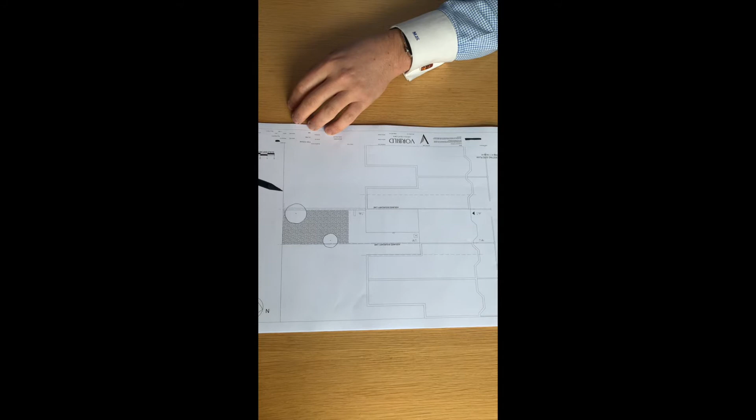Again, a very typical project from start to finish, where we were planning to do a rear extension, a side extension, and a rear dormer. So let me walk you through it.

As you can see at the beginning, it's again a fairly typical setup. You have a narrow entrance passage. The front reception room has a separate door, the rear reception room has a separate door. This one differs because somebody put in a window in between, which is definitely not original.

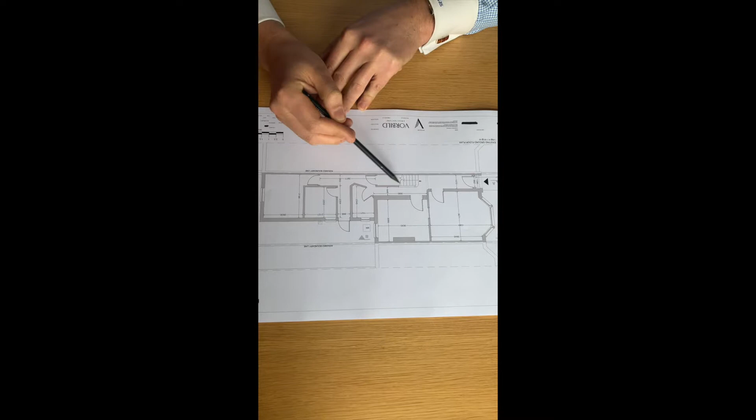And then we walk past - there was a downstairs bathroom already, and believe it or not, that was the kitchen. And then we had a room at the back, which probably would have been better as the kitchen, but still it's pretty small and awful.

Going upstairs, we have 3 bedrooms. Biggest size bedroom is obviously on the front. That bedroom isn't too bad either, and somebody has actually done some work before we came on board.

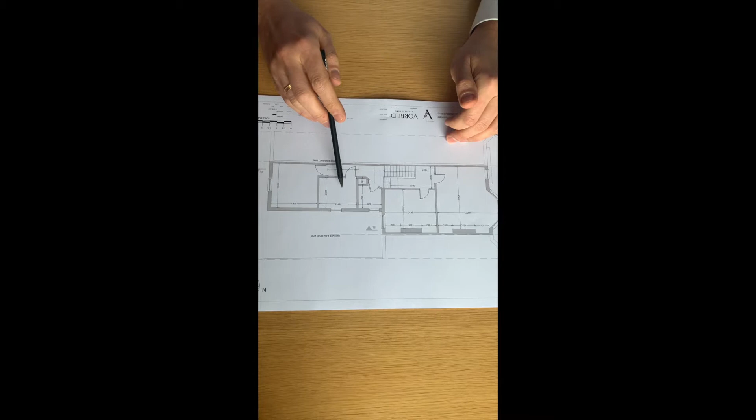There's a small WC and a larger ensuite family bathroom, and of course the rear bedroom, which is always the smallest, like in our case.

And there's nothing - so in our case, just going back to this quickly, somebody removed most of the ceiling above here. So when you're here, you can actually look up, and it makes you feel as if there's much more space. Obviously, now that we're doing the loft space,

the ceiling obviously has to match the ceiling height of the main house. But let me walk you through the proposed plans now.

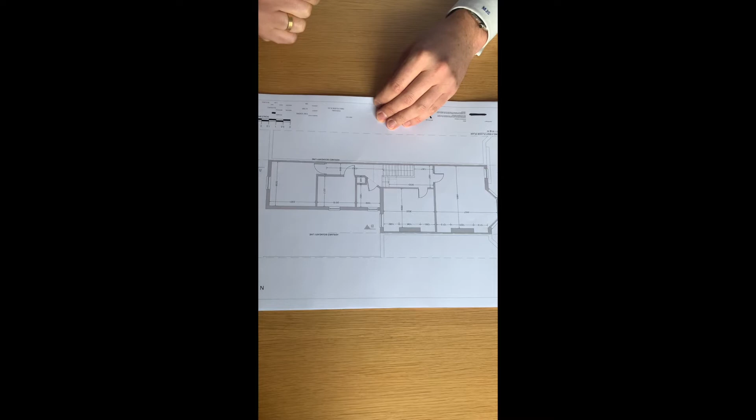So this is the proposed site plan. This client wanted to extend this quite a lot, to be honest. Starting with the entrance area, obviously none of the neighbors has had a bin enclosure, so we've given him that. And obviously you always do some work to the front garden.

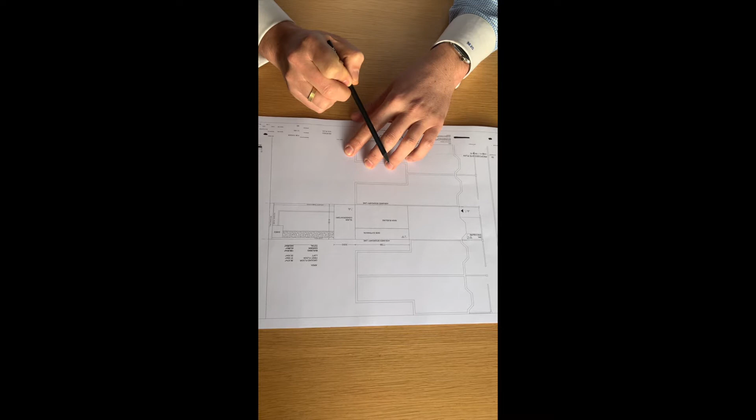We got permission for a side extension, full width. And basically, since it was difficult to get a rear extension, so what's referred to as a wraparound, we got this separately through permitted development as a sort of glass conservatory, which ended up pretty much glazed with a glass roof and so on. The back, because neither of the neighbors' gardens were particularly nice to look at, and we have no control, of course, of what they do in the future.

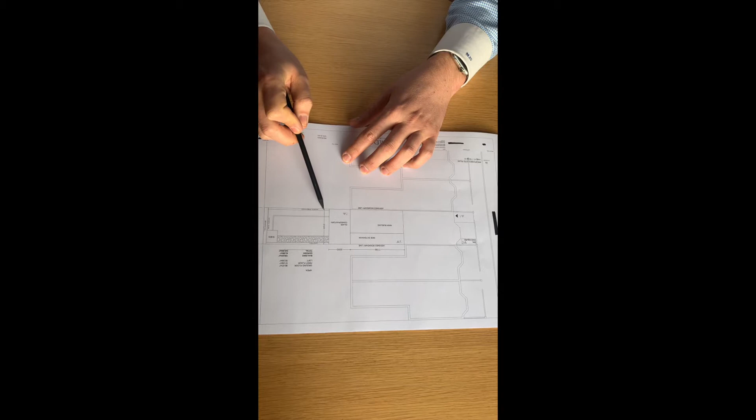The whole point of this project was to have a fence as high as possible, so 2 meters, and have, in this case here, a planter and something we refer to as an acoustic timber fence, which is merely a fence with some planting on it, and then a shed with the central area left as turf. So again, quite a typical setup.

You have the summary of areas here if you're interested. So let's dive into the ground floor.

This actually got us very excited because right from the start, the client wanted to create a quote-unquote open plan as much as possible. So as you enter, we finally got a good place for a display cabinet, which in this case ended up being quite a large fish tank. So finally got one of those.

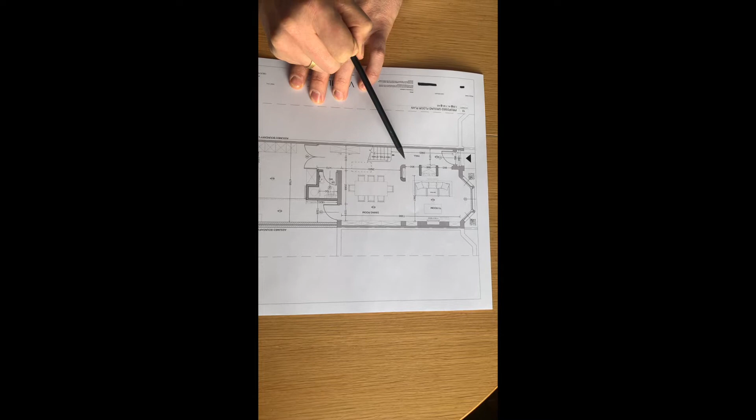And as you walked in, you of course see the new steel staircase with a glass balustrade and a grand dining room. And then you have 2 ways to get into the kitchen.

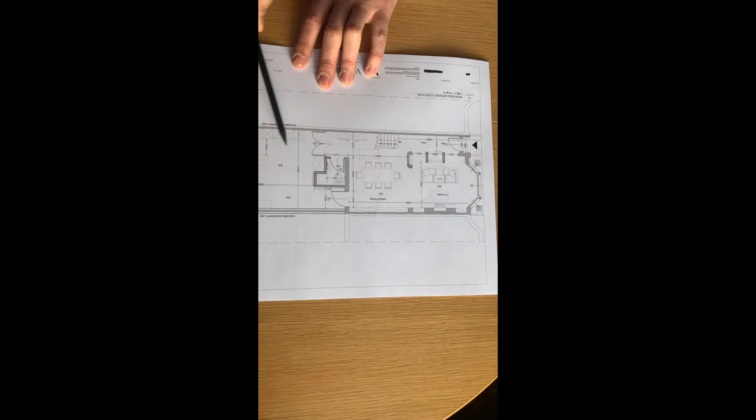Either you walk straight through and you get into the kitchen, which has got loads of light from roof lights in the side extension and even more light from the glass roof in the conservatory. It's a very contemporary open plan kitchen.

And still, what was very important is to have a downstairs toilet. So always when you have a setup where you have a big open plan area, it's kind of difficult to place a bathroom, which can't be open plan.

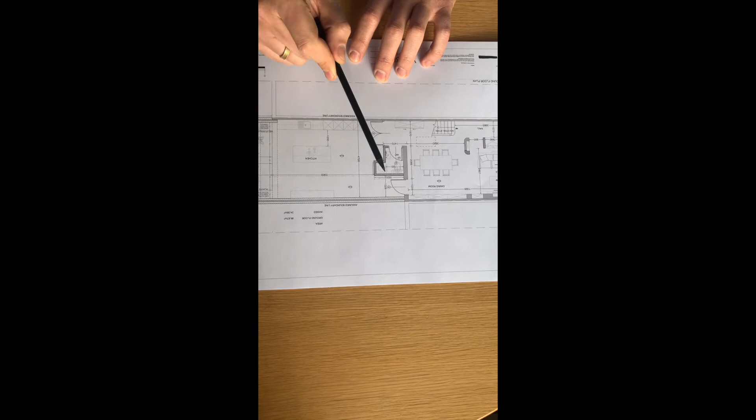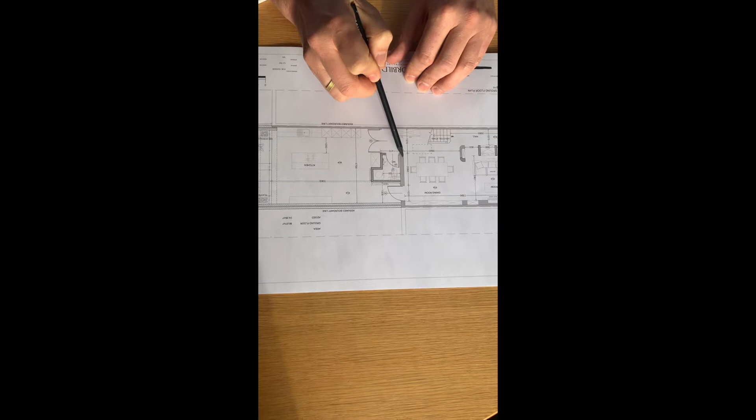So in this case, what we've used is actually a solution we've used many times since. You have to remember, this is the main house. It stops here. And by keeping this wall, or actually most of that, because we even kept the existing lintel, it's just the door got changed from the previous window, you can maintain the structure and save yourself quite a bit.

Use the wall, onto which you can obviously hang a picture from here, as we've done. You can add the bathroom hidden behind it, and I think with that, it doesn't feel that you've put it anywhere where it blocks the natural flow. We made it a bit bigger to house a washer and dryer stacked, so the extraction can go out here straight away.

There was a lot of back and forth with the client, but we eventually settled on having an additional kitchen unit here. This ended up being the kitchen breakfast bar.

They wanted a TV, but there aren't a lot of walls here which aren't occupied by the kitchen. Placing it in the children's play area didn't seem like a good idea, and it would also get quite a lot of glare onto the TV. So this was chosen as a good spot.

The rest is basically kitchen, and then we walk into the sort of conservatory glass roof area with the waterfall, which is still to be installed. Still, it's a very, very lovely open plan kitchen.

So in case you wonder how we got away with it, the key was to use what's called a mist system, because in terms of fire escape from the bedrooms above, the new bathroom and bedroom on the loft level, everybody has to be guaranteed a safe escape route through the entrance door.

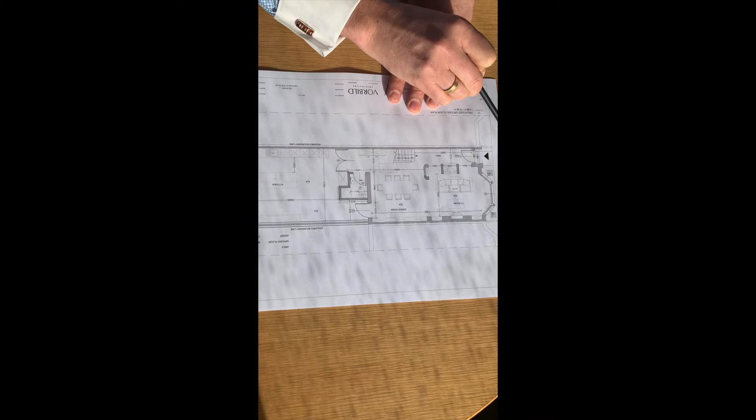By not having the traditional walls and fire doors which you would have had before, we need to protect this particular corridor.

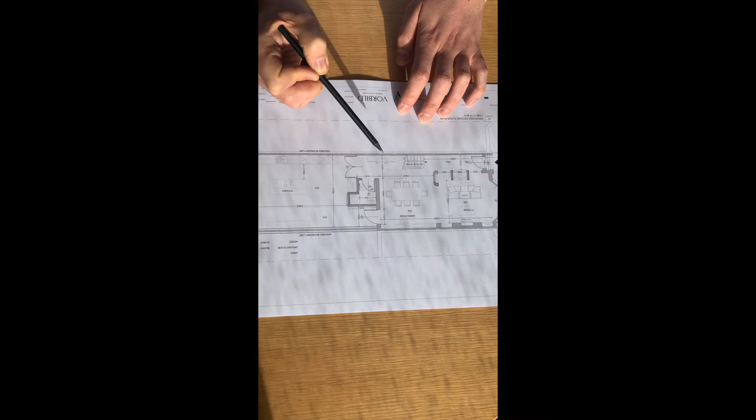A fire curtain wasn't a good solution because it's quite a large area and these things would just mess up the whole space. So we basically installed a mist system, which is like a sprinkler system, but a light version of it.

Going up to the first floor level, if you remember we had 3 bedrooms, and guess what, we still have 3 bedrooms. However, we've managed to put in quite a few ensuites.

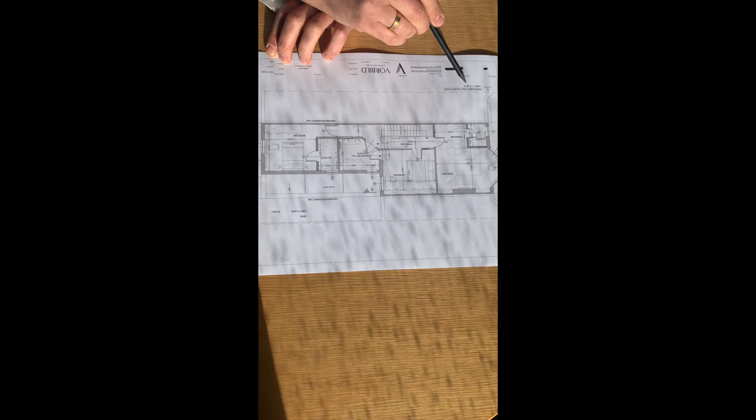We had a wall somewhere here, if you remember. So now it's gotten a little bit more complicated. Let me walk through that.

With this setup, every bedroom has got an ensuite, yet there is still a family bathroom just in case. Starting from here, it's not a very common solution, and I have to say this is probably the first time we've actually built this.

We created a very small ensuite using the window here, literally just because there seems to be quite a lot of depth, which the client was happy to sacrifice.

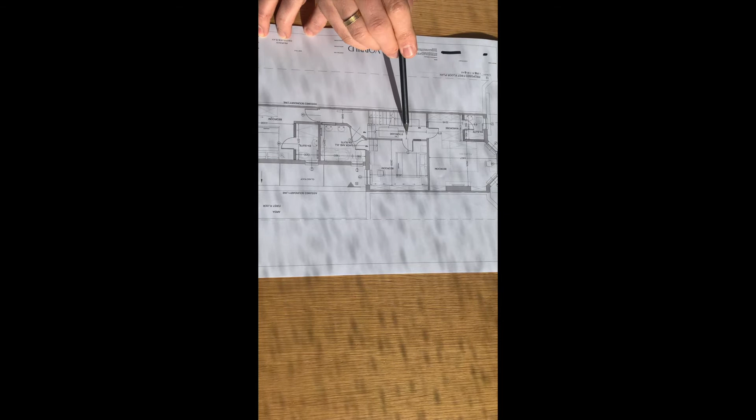So you walk in, you have a small double-sided walk-through wardrobe, which we had to slim down a little bit with the depth. This particular one only had shelves, and you walk in to shower, toilet and sink.

So again, pretty good. And then you walk around, and we have a foldable bed, one of these clever beds which you can fold all the way up. So this room could have different uses.

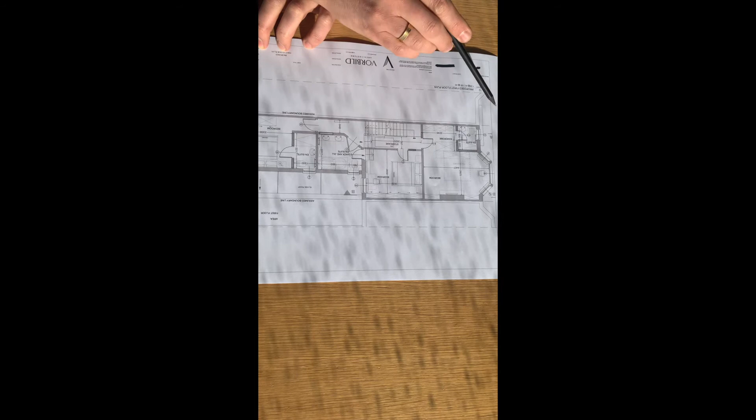Not just a regular bedroom. The family has got a few children, so that's sort of one of the reasons.

Here, we gave ourselves a little bit more space for the door before we come in. So you can see there's a small area of newly built wall. That door has literally just shifted to the side, because otherwise it was very, very close and we couldn't really have a bedside table here.

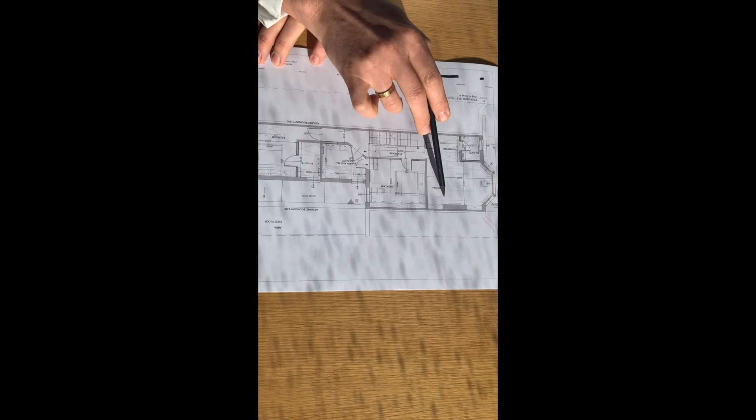So you walk in. By getting rid of this particular fireplace - this one we didn't remove, by the way, because we still had a fireplace, just a much more modern version below - we needed the flue here to go all the way up to the chimney.

Here, however, we decided not to. So we used the whole wall for a full height wardrobe and a desk to study.

And then this is maybe the thing which isn't done very often for various reasons, so let me explain. As you go up here from the ground floor, the minute you're at this level, this whole floor here is on one level.

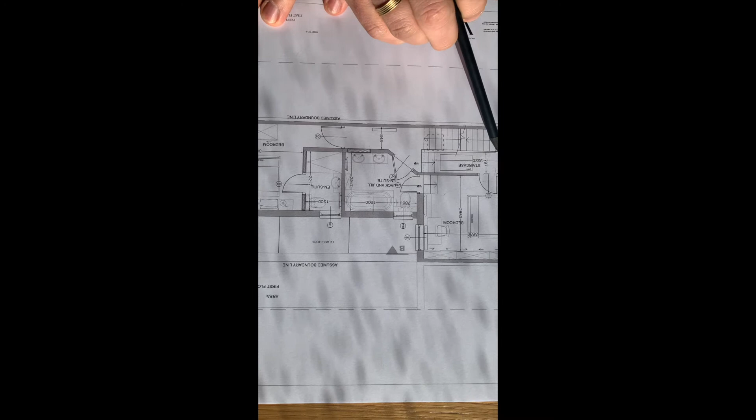And then the rest of the house is on a level 2 steps up. Now this could vary in terraced houses.

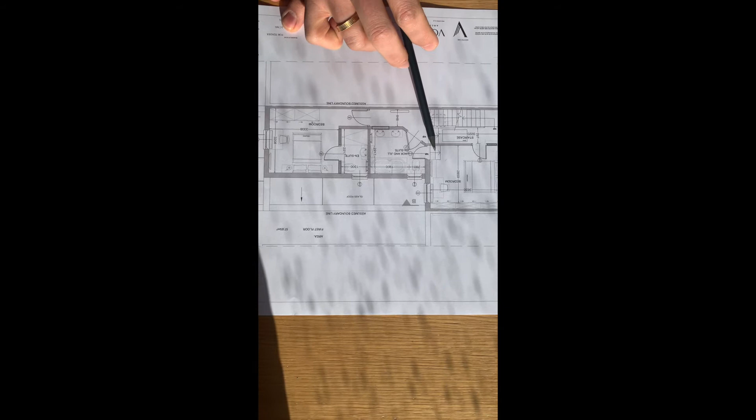You sometimes have 3 steps up, which I think is the most common, sometimes a bit more. Because we only had these few steps, we decided to basically replicate them and give another access from this bedroom directly into this bathroom.

I suppose you could argue you could just walk out and walk here, but our client preferred that this is actually an ensuite. We kept this door just because it's not a bad location for a door.

And then another not so much trick, but something we do quite often: by utilizing that we have existing connections here anyway to the bathroom, you do another bathroom on the back of it, so you can share connections.

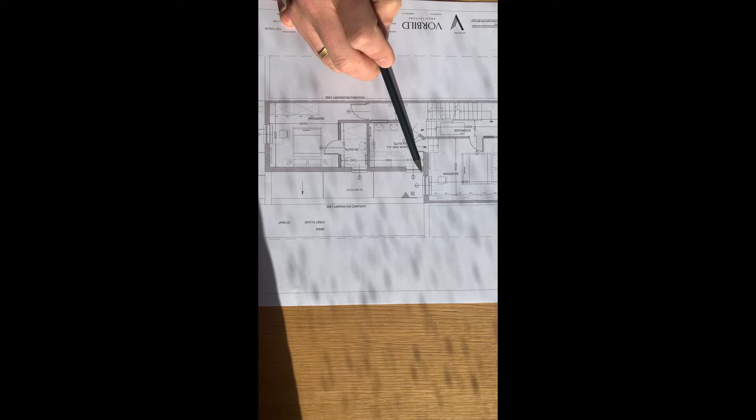For example, the toilet waste pipe was here in the corner as it was before, so it was relatively easy to get there.

Also, as I meant before, by moving this door forward towards this side, you technically increase the area of the bedroom, because normally you would have put this door here, which would have been completely fine.

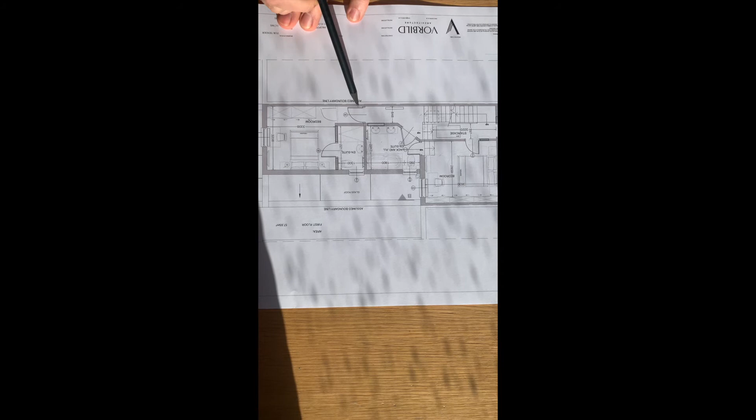But by moving it a little bit further across, you can add this area on paper to the area of your bedroom.

It's not horribly useful space, but as a resale value, it adds a little bit of brownie points, basically.

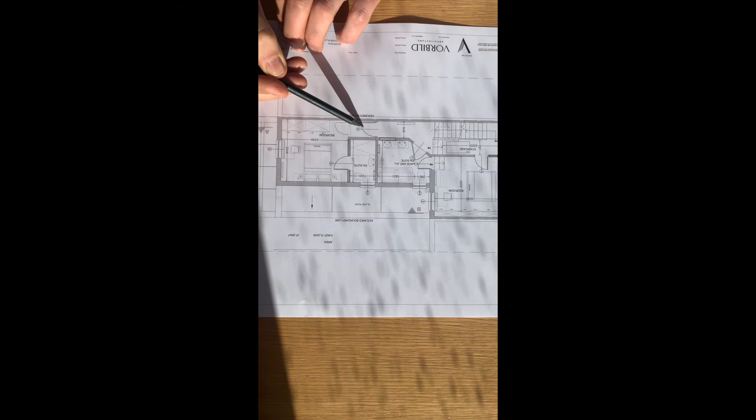And again, this is a very, very typical layout. We have the bed on this side. Wardrobes not all the way through because you still need to go past, and it's one of the boys' rooms.

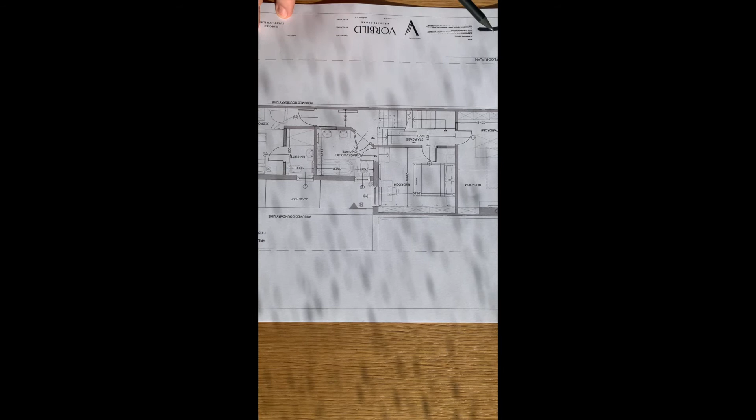Quirky little thing, since the whole staircase and basically most of the building was completely gutted, we put in a small walk-on glass floor, which is basically a non-openable piece of double glazed glass, toughened and laminated, so you can walk on. It wasn't big enough that we had to have it sandblasted. This is personal preference, you just have to deal with potentially people looking up.

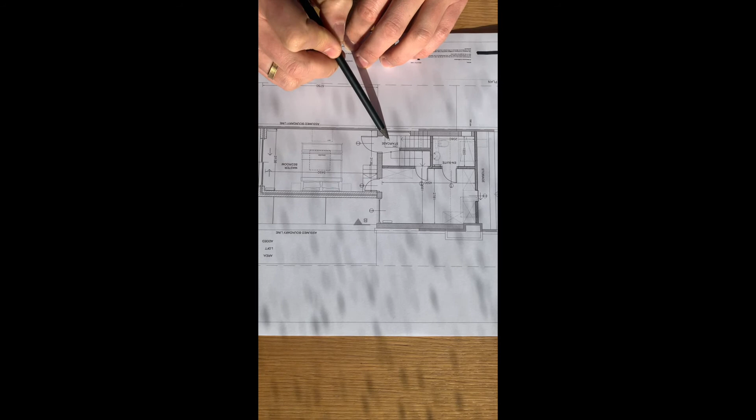But the main reason for that was once we go up, we had another walk-on glass bit here. It wasn't, unfortunately, right above the one I've shown you before, but because there is another roof light above here, you do get quite a bit of light through. So it's the best you can do, I think, with still having a very, very compact staircase.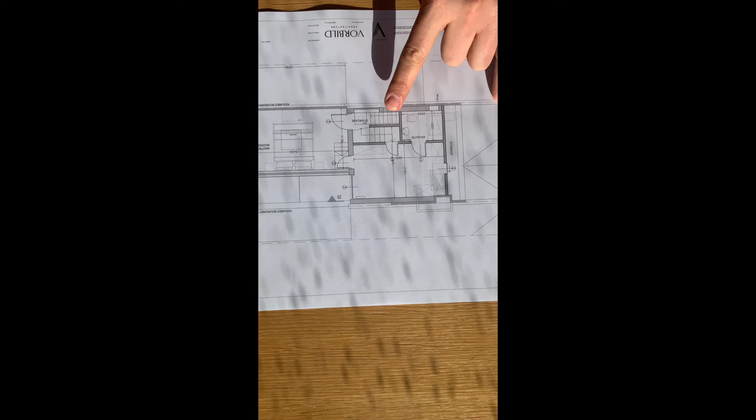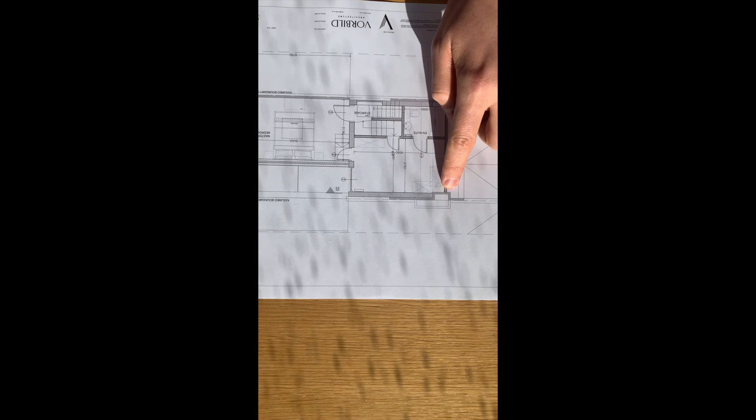So this is the loft, and this is one of the few L-shaped roof extensions that we've done. Just to remind you, that's the front roof. You keep the front slope of the roof, and add a dormer to the back. It's shown a little bit bigger because, technically, the space from the ridge line towards the front of the roof still gets the benefit of quite a high ceiling. So we can utilize that space as well.

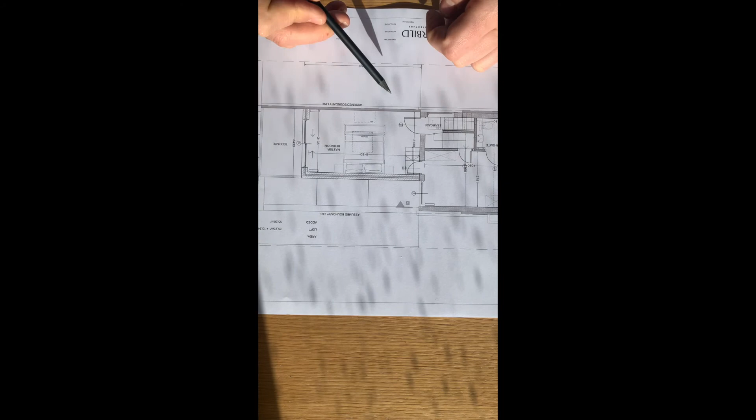The difference here is that, thanks to permitted development, we got permission for an extension on the rear part of the house, hence the L-shaped extension, and it was big enough for a bedroom. Facing this way, it was not a problem to have full height glazing. The only downside with these kinds of setups is that normally, if this stays a rear roof, you get much bigger possibility of a larger opening with glazing. Here, you have to refrain yourself, so it's just as wide as the side passage. But you get an additional very, very good bedroom.

So in this case, the whole space became a master suite. Again, this was a lot of back and forth with the client, but I think it's very good that we ultimately decided to go up. You walk straight up, and the level difference between this and that will always have about 4 or 5 steps, which is what we had as well.

Since you remember the setup from the first floor below, the client wanted the possibility to walk in from here to here straight away, rather than having a door here, because that was getting really difficult. So there is a separate door, and this space is at the moment a fairly large, admittedly, his and hers wardrobe, a dressing area with wardrobes. In the future, however, because that door can be closed, we have this door, which could be used as a separate room. Granted, the master bedroom loses the ensuite, but there are other rooms downstairs which can be utilized. So in many ways, there are probably more doors here than you absolutely needed to have.

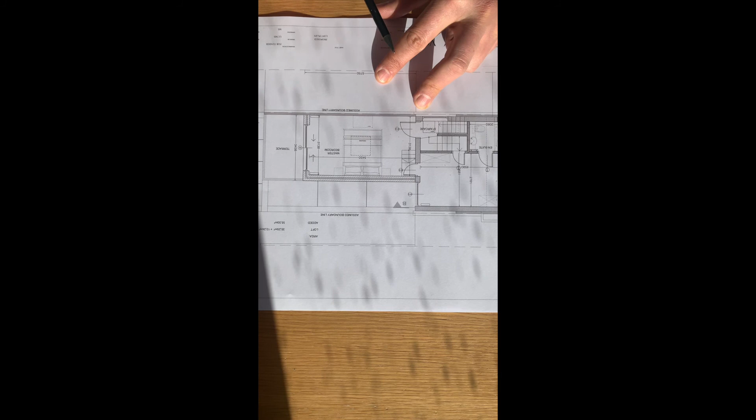However, there's a bit of future-proofing built in. And it's a really amazing space with a fixed 2x2 meter roof light, a large flat roof terrace, which we cheekily put in as well, with great views for a distance. We just refrained from having a big roof light here because, as a dressing area, you have full height glazing here, which we actually made not openable, so you can't hinge it out, but you can kind of flip it a little, turning the handle upwards, so to speak. That's why you can avoid having a glass balustrade here.

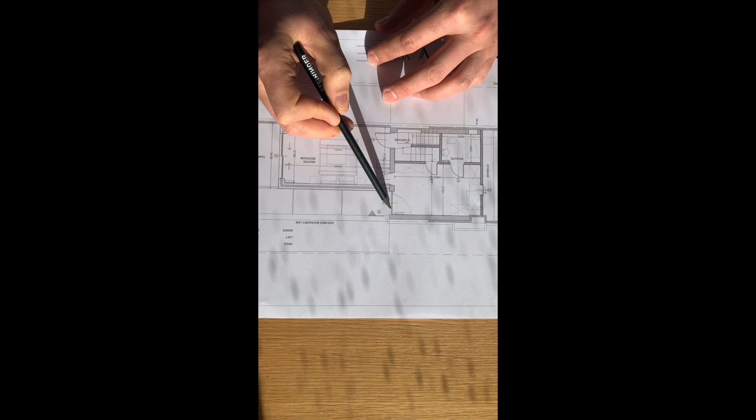You can't do that with all suppliers, but if you use UPVC like we used here, that system is possible. So basically, you can't hinge it open, but you can kind of flip it open, so to speak. And yeah, that's pretty much that. So again, just to show you roof lights.

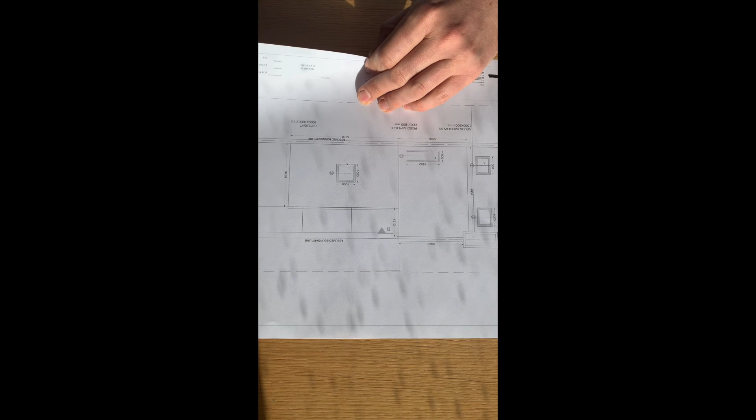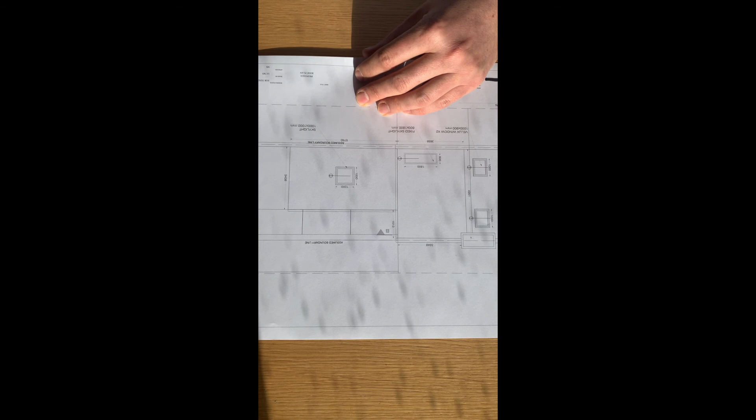Yeah, that's pretty much the whole project. I hope you have enjoyed it. Let me know if there are particular aspects you'd like me to go through in the future. I'm happy to scribble all over the place, but I thought it's probably easier for you to understand to show you the before and after. Again, happy to, for example, sketch out a few options or show you a few layouts, and then I can let you guess which layout was chosen and built in the end. Let me know if you have any thoughts or comments, and I'll see you next time.